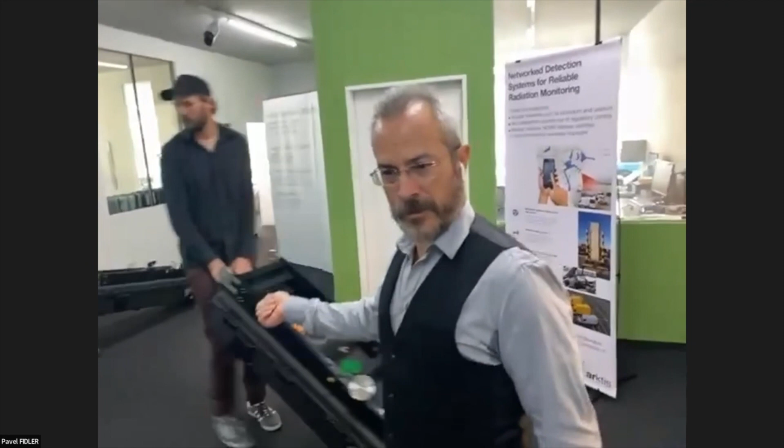It can scan for radiation while moving in a truck. You put it on the back of your car and use it, or it can be implemented as a portal. So the guys now are trying to mount it. It takes a few minutes. Essentially, the mounting process is made to be fast and stable.

The implementation of this can be done on uneven surfaces, and is thought to be deployed in situations like big events, even on grass or mud, or during radiation accidents, or any kind of application where you are mounting a checkpoint for a small amount of time, like a few days, and then you have to dismantle it.

We have two systems here in Switzerland, bought by civil protection, and they use it for doing checkpoints at airports, for instance, or at borders sometimes. We had a trial with customs a few years ago, on a system mounted into a van that is very similar to this. Actually, we use the same technology.

You can imagine Arktis technology as a building block. Our building blocks can be assembled together in order to generate a system that is fit for any scope you're interested in, especially in homeland security. So the technology you have inside, the user interface, and the way to use it is the same, essentially, from system to system, which is essential because every time you move from one system to another, you don't need extra training. You just work on the same user interface, applicable to another operation.

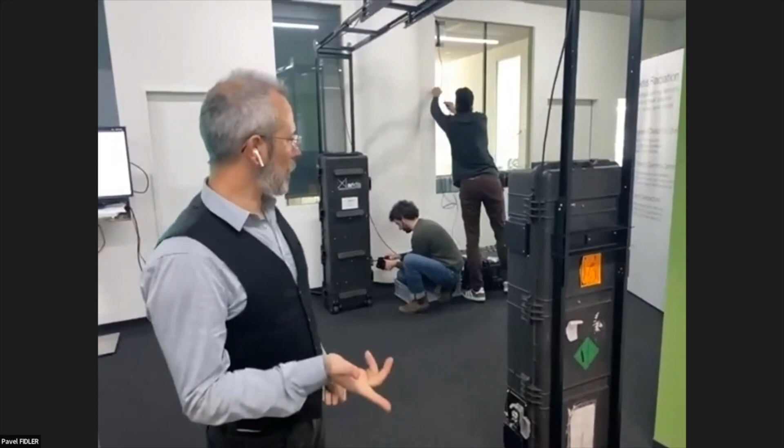This is one of the reasons why you can use it on the way to the place where you're doing the checkpoint, at the checkpoint, and the way back on the same day without needing to plug it in anywhere. Which is critical, especially in cases where you are deploying the system after an earthquake, for instance, where the infrastructure is not guaranteed.

It's connected via Wi-Fi, so you can see the user interface without physically connecting to the system, staying at a reasonable distance, even 10 meters, without being forced to stay close to the detector. Same goes when you're using a car - you put it in the trunk and you can see from the front seats the readings and the alarms and everything.

So the system is in practice mounted already, ready, as you can see. It's deployable by 2 people in a few minutes. In the meantime, while they finish this, I will show you the other device we want to show, which is characterized by the same type of features, like very fast deployment and very easy to manage.

We are talking about the drone module that Pirmin is bringing here. Also, this one comes in a very robust box, so completely free from bumps and scratches and vibration. The device is commercially available, everything, starting from the drone to our detector. Can we zoom in?

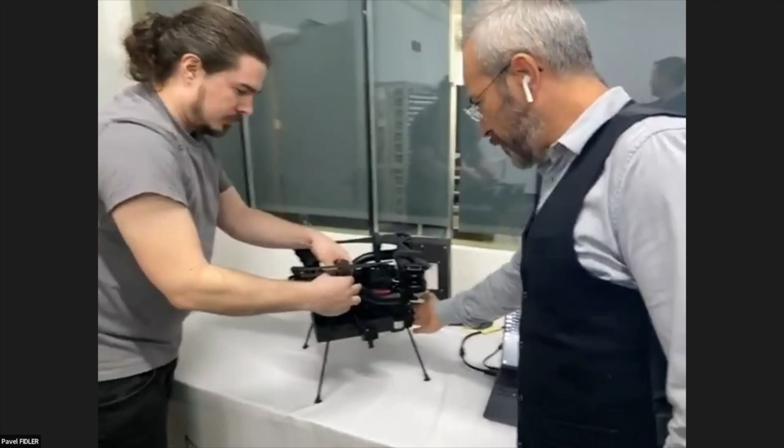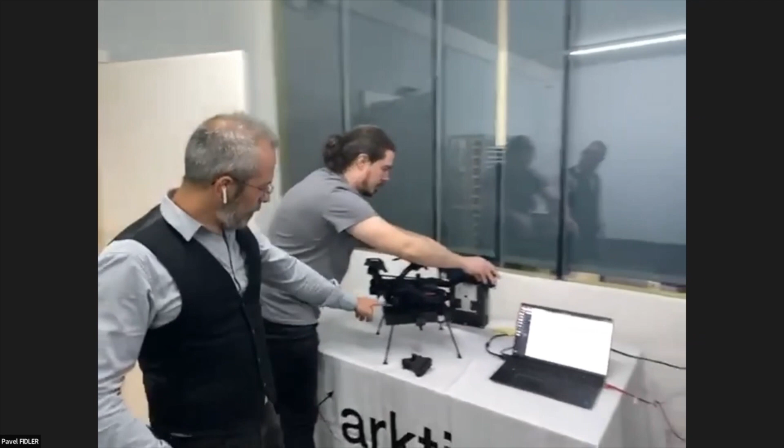And it's meant to answer all the typical questions that first responders involved in radiation monitoring are asking for. It comes with a LiDAR down here to measure the distance in real time from the drone to the ground, and with a camera for having visual evidence of the findings. The detector here, as you see, is way smaller than the other, because one is made for ground operations and this one is made for airborne operations.

And this drone, as I said, is commercially available. So it is not a prototype, that's a product. The drone itself comes with a set of batteries. Those batteries are characterized as being hot swappable. So in principle, if you have enough batteries, you can run a mission that can last for hours. Even though normally a drone can fly for 15, 20 minutes, the mission itself can run for hours thanks to these hot swappable batteries. Essentially, hot swappable means that you can replace the batteries without losing the power supply.

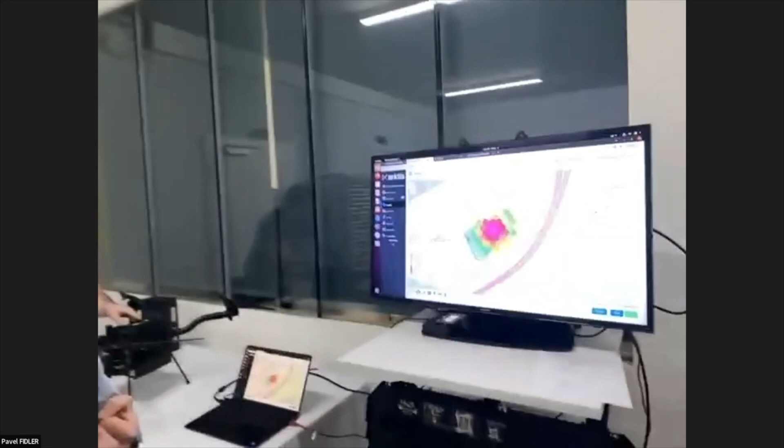The drone itself comes with a navigation software that allows you to generate a map. As you can see, running a small demo here, you can see a map. You can navigate the system using GPS location.

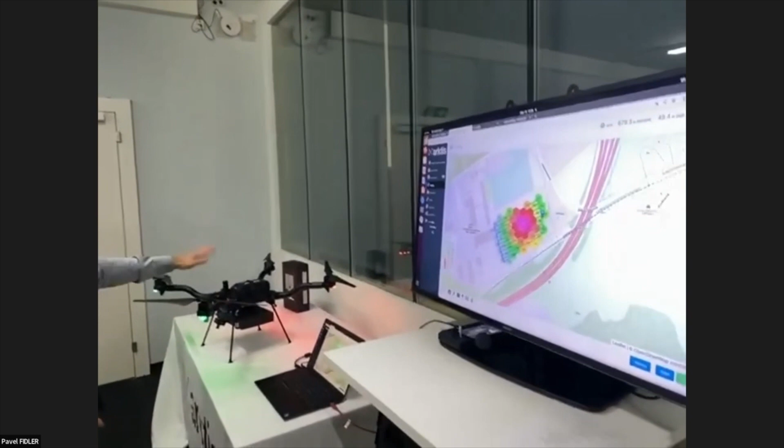So essentially, you can plan your map and your mission beforehand. So when you go to the place of the mission, you can already be ready. When the drone is at this level, so 2-3 minutes, you already have everything that you need for launching your mission. So time is essential, and this is what we try to do.

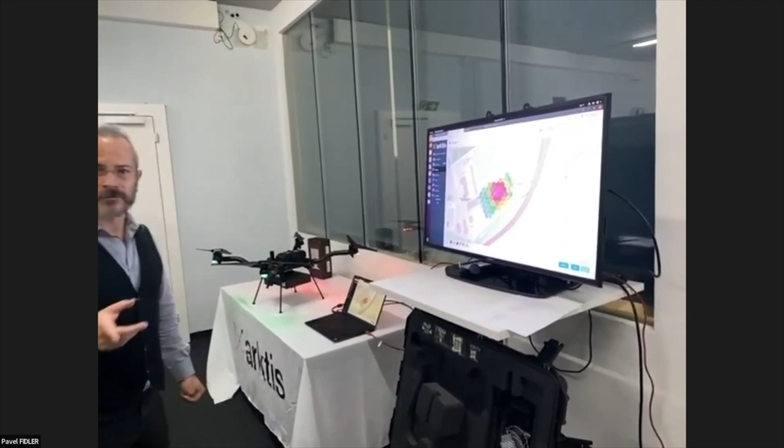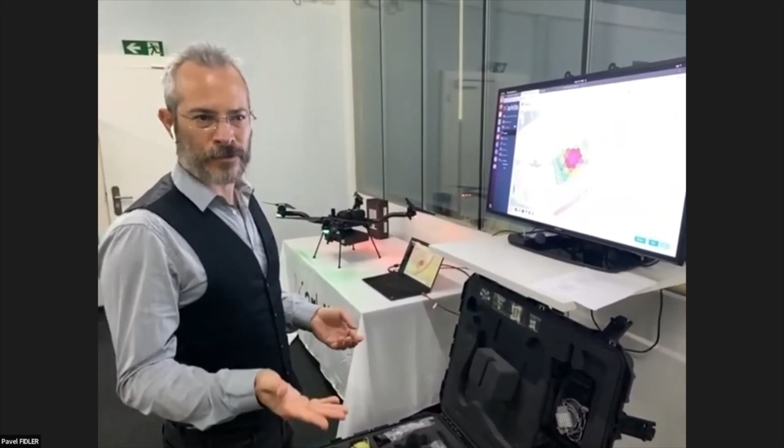The drone itself is connected to the ground station via Wi-Fi connectivity, and we can also provide an extra tablet, so that each user, even if not flying the drone or on site, even remotely, for instance from the headquarters, can see exactly the same thing you see on site, in real time. This is also critical because when the mapping is done, if there are no experts present on site due to risks or time implications, they can stay at headquarters and support the local team in real time. So the system is, I think, both ready.

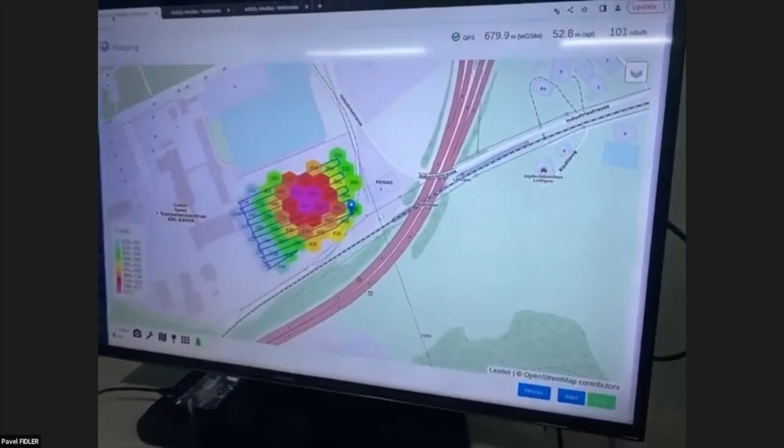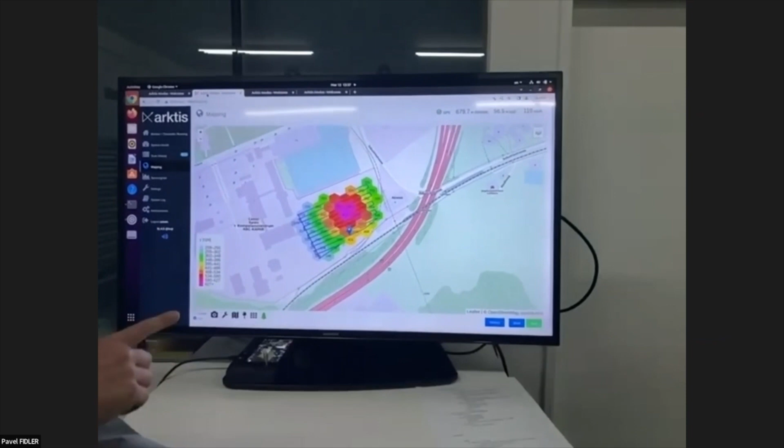We can show you right now a pre-recorded mission that we did at Labor Spiez some time ago. The mapping system here can record everything happening in real time, and then you can replay it after you download the data and information.

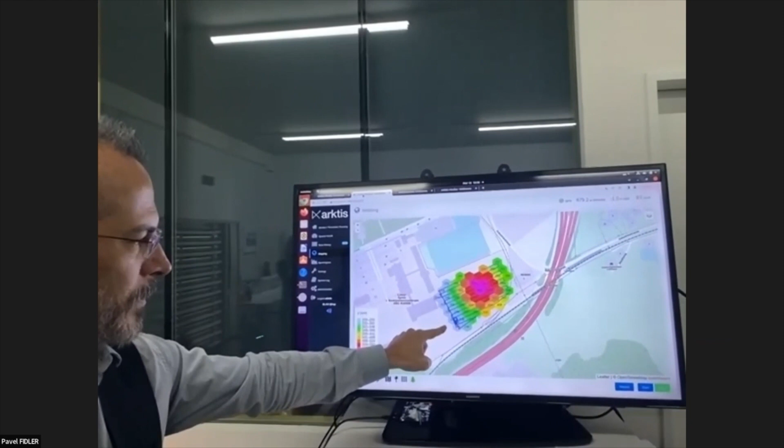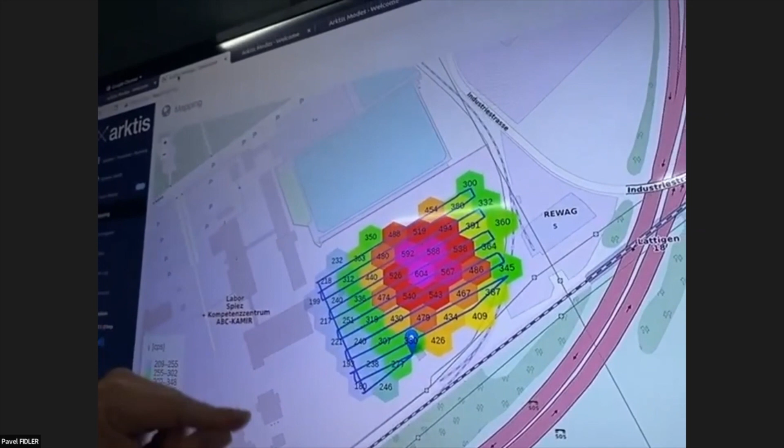Here you can see the virtual drone repeating the real drone mission, populating the map with the count rates coming from the detector, and based on that generating a heat map that tells you where the radioactivity hotspot is present.

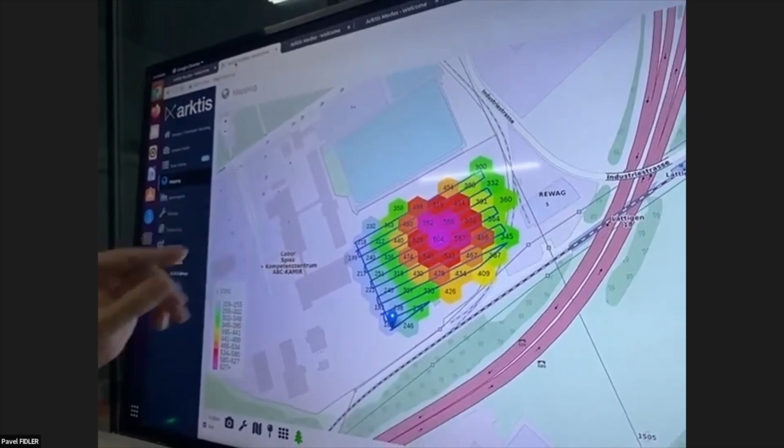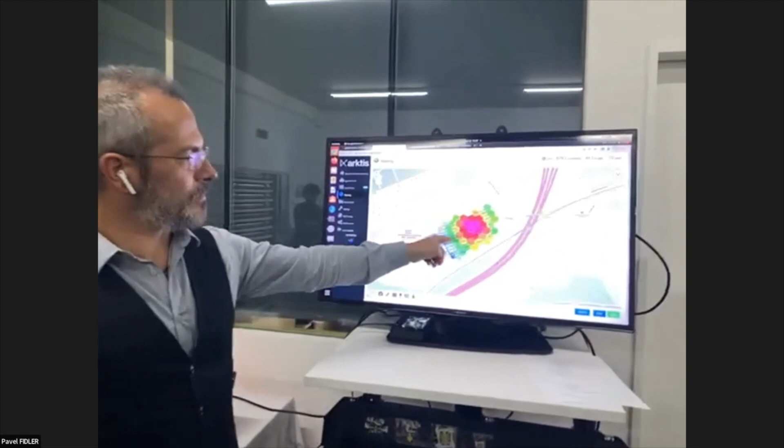The typical missions for this system are either mapping a wide area which is radioactive for whatever reason, like the explosion of a dirty bomb, or finding and identifying lost sources. That's a case where the radioactivity is diffused, but when we go for hotspots or single sources, you can easily identify down to the meter where the source is.

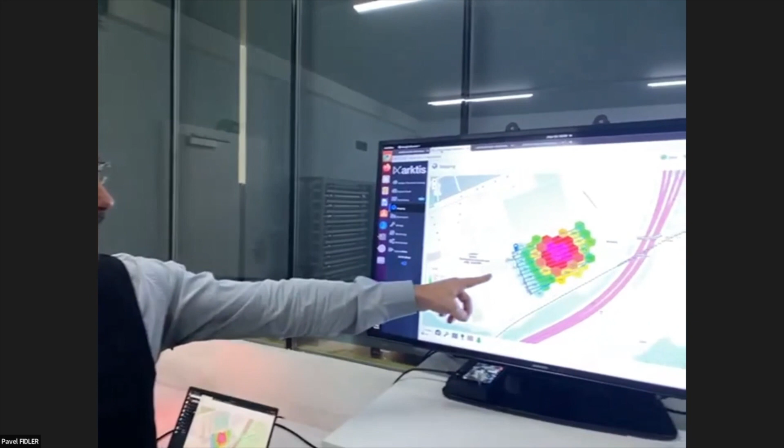And this, with a single passage, the drone can do. In a specific case, we were looking at a 3.5 gigabecquerel cesium-137 source, and the drone was flying at 50 meters altitude and 10 meters per second. So a quite fast run, and essentially in real time, what you see here is the actual speed of the drone when it was flying.

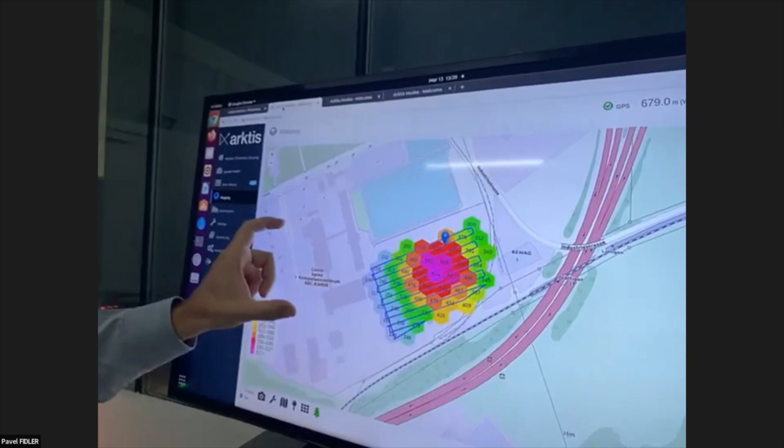So it can be done systematically like this, or it can be used to look for the highest radioactivity to investigate a specific spot.

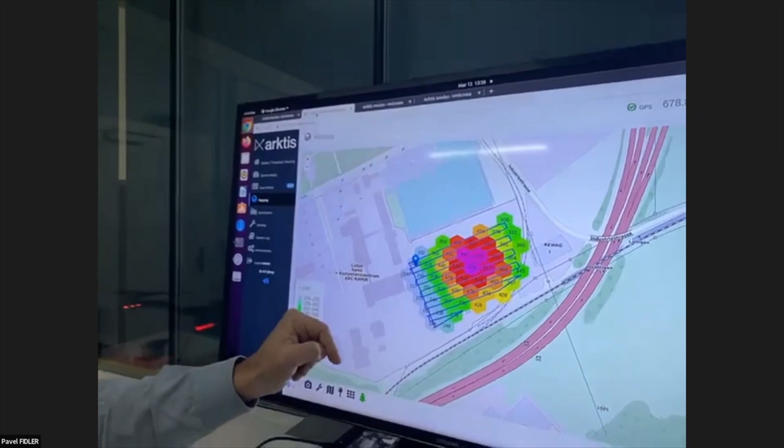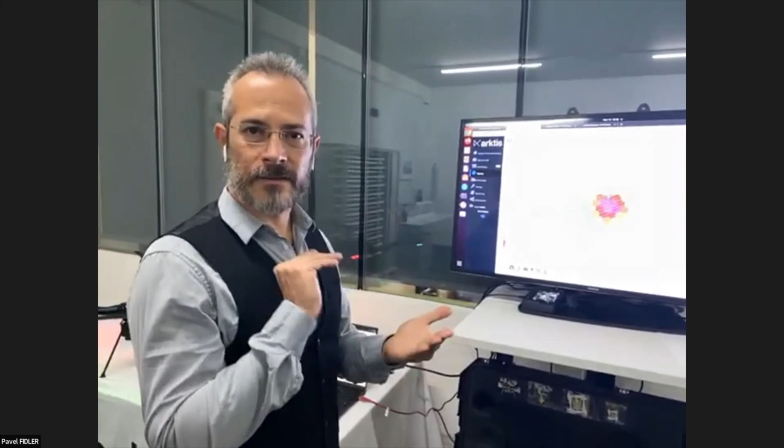Critical for the responders could be the dose at ground level, which is measured and calculated thanks to the LiDAR that constantly measures the altitude of the system, adapting the readings to the drone position and projecting them onto the ground. And the camera can snapshot the area you are investigating, to see if there's a visual presence of the source or anything radioactive.

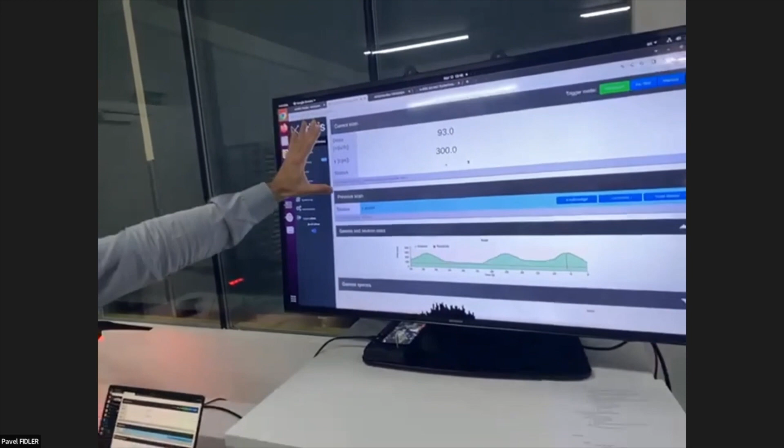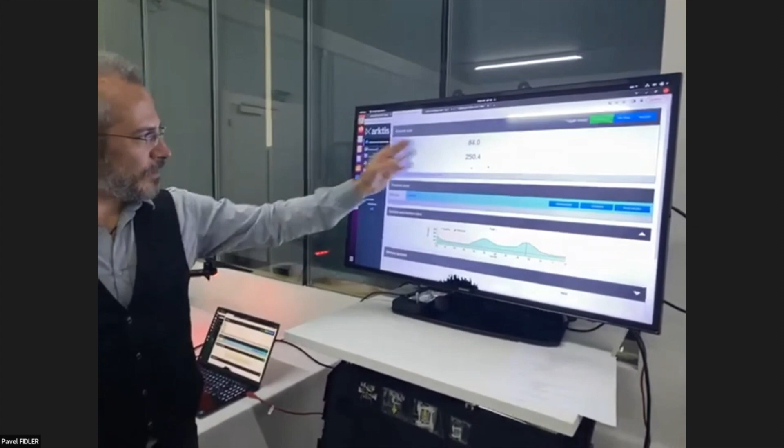The user interface, you can take a look. In general, the user interface has a first page where you have the basic readings. This is shown on a big screen for you, but you can also see it on your mobile phone. You have the readings, information about alarms, readings in real time, and the spectrum.

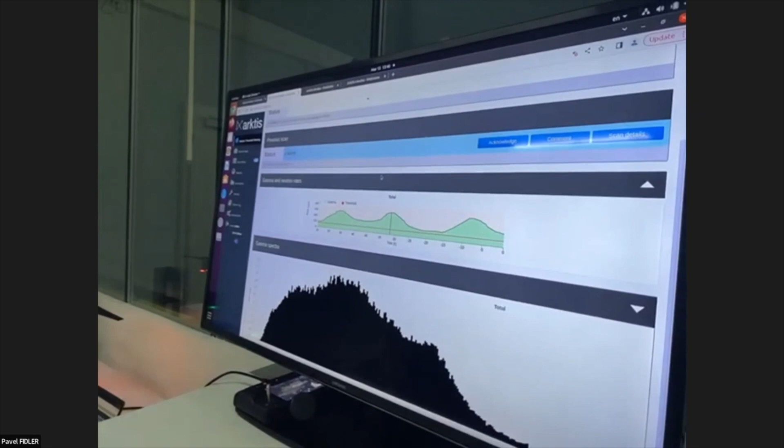The critical thing about this device is that it works exactly like the crystals, and it also comes with identification features for a range of isotopes, selected together with the end user to be the most common ones. So instead of having 100-150 different radioactive materials in a library for a crystal, which is far more expensive than a plastic scintillator, we selected only a few that cover essentially 95% of findings based on experience. Based on that, we can provide specific identification.

So you have information about radiation levels, the visual position, the map, and also the radioactive material identified, which is essentially critical. Now, if there are no questions, an interesting application for customs—

If you consider at the borders, there are always long queues of trucks waiting to be allowed into the country.

If you use one of those drones to do a preliminary check for radiation, you can fly high over the long queue of trucks, and based on the readings, you can pre-select trucks for a secondary inspection without slowing down your processes or deviating from the lane. Before a truck even gets to your kiosk, you can already say this needs to be more investigated or not. One of those missions will probably last 10 minutes or so. This will strongly help customs in their operation, adding radiation monitoring that is not very common in Switzerland at the moment.

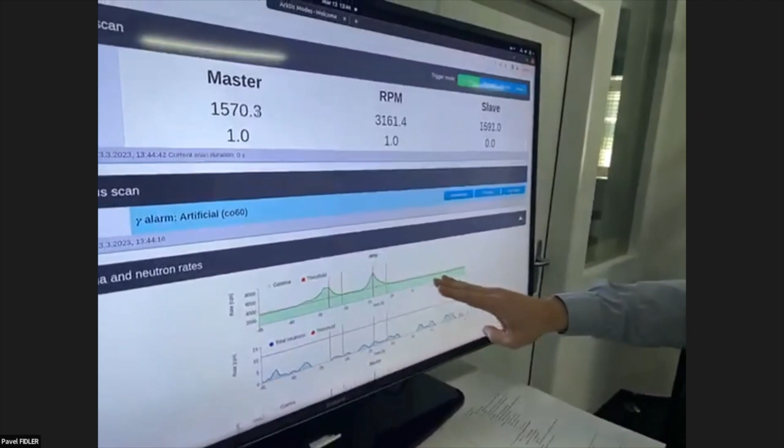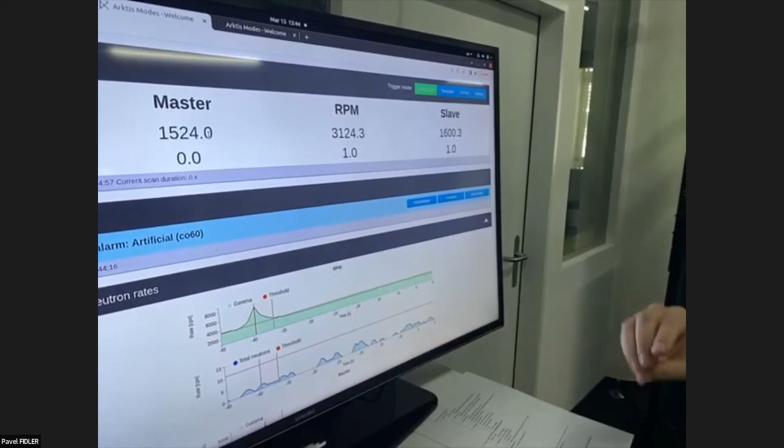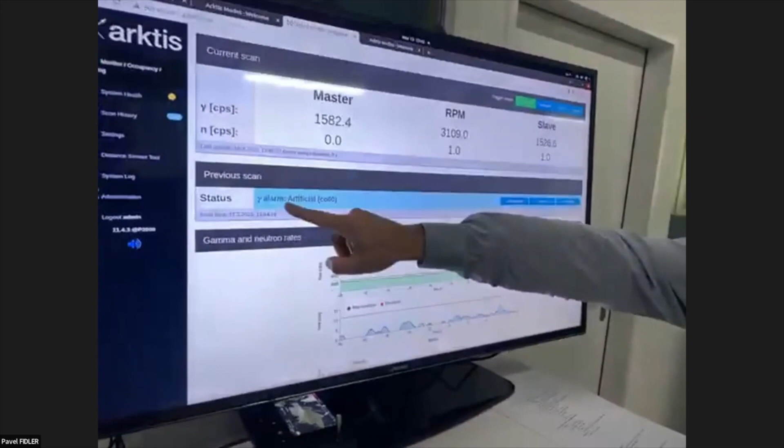So essentially, what happened? He was passing through the portal set for cars - it's very wide at the moment - with a very small testing source, and the system was showing this much count rate over the natural background. The system recognizes the presence of a person passing through thanks to the occupancy sensors, and the readings are anomalous over the threshold and over the background. This generates an alarm that is saved into the system and can be exported in real time everywhere you want. It also gives you information about what has been found. In this specific case, it was an artificial source, cobalt-60, which is a common industrial source.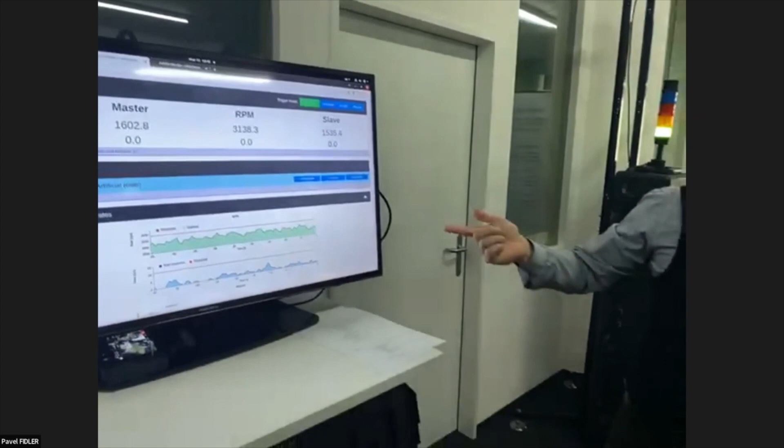We are not using any crystals, only plastic - this is one of the unique selling points of our system. As I said, we can do exactly the same thing with the drone, and they work in exactly the same way. So you can also show how the drone works with that.

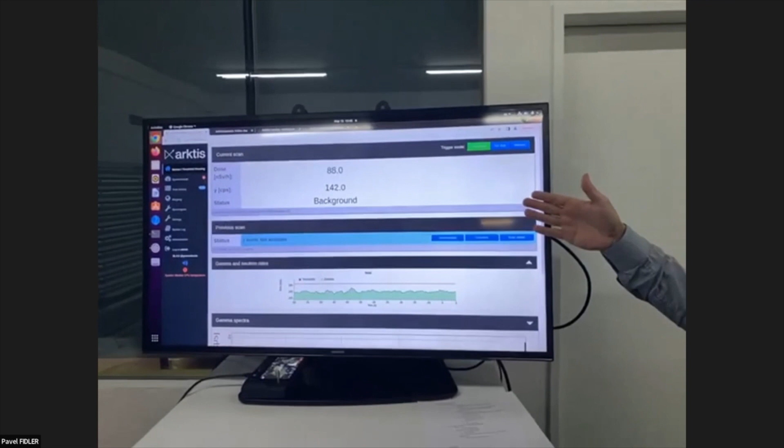We will swap the screen to the drone. So you see, essentially, when you look at the screen like now, you don't see much difference to what it was before, because the concept is to have the same user interface regardless of the system.

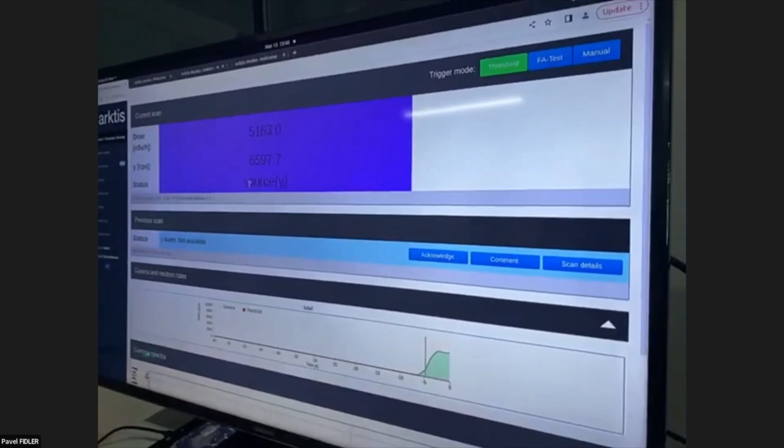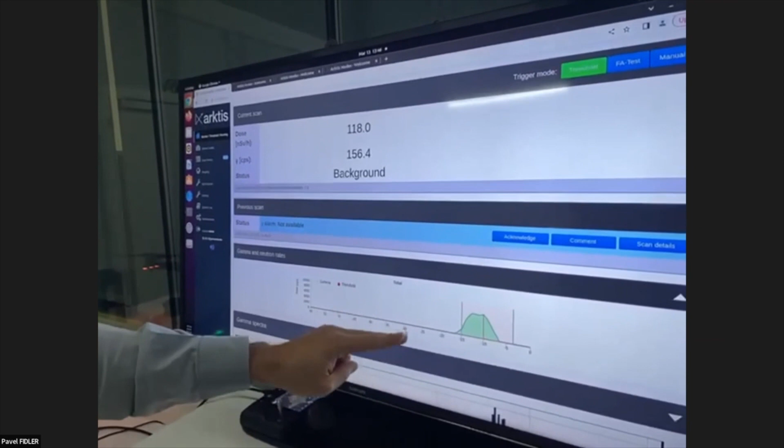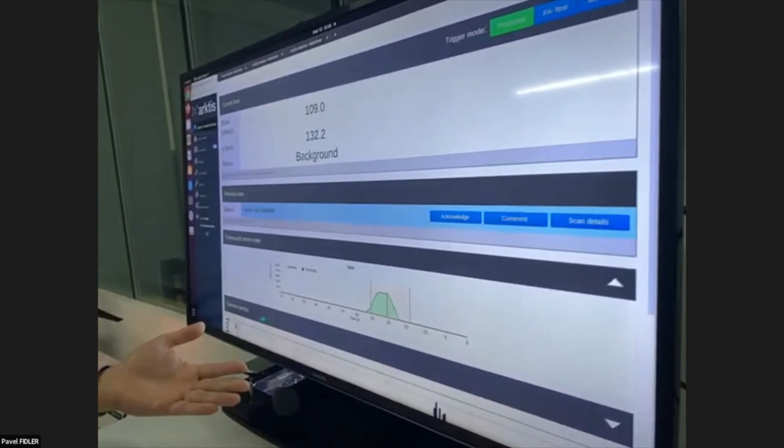Can we try it? Okay, please go on the screen. There we go. So as you see here, the detector reacted pretty strongly, to the point that you don't see the background anymore, because this system is supposed to be extremely sensitive, since they fly at high speed and high altitude. So to have a source so close is unnatural. But as you can see here, it's easy to verify the presence of a source and when it happened. This moving plot is in real time, as I said.

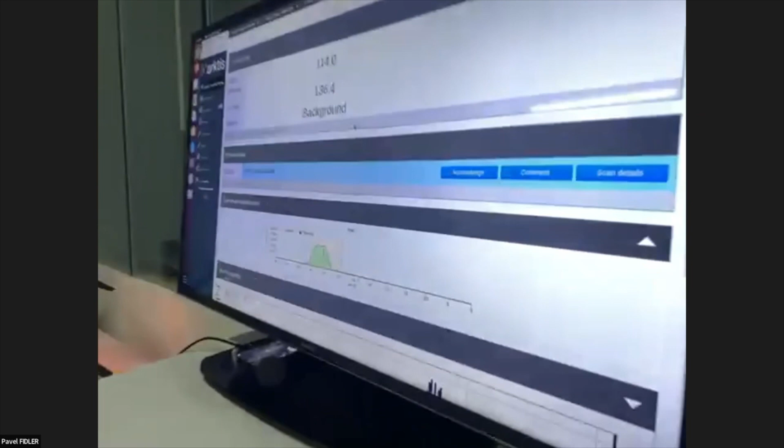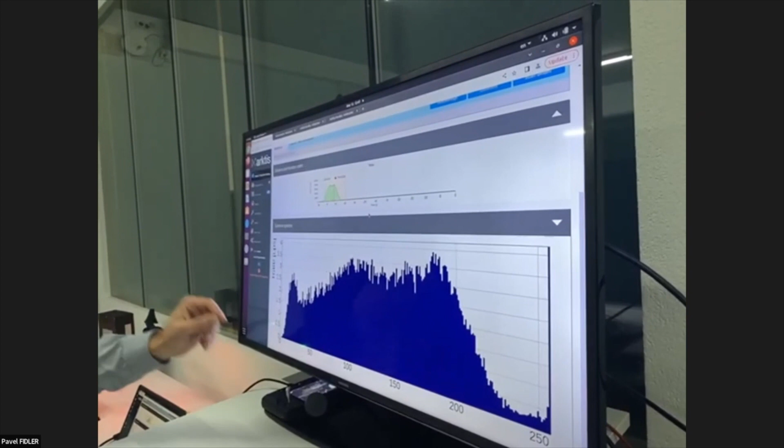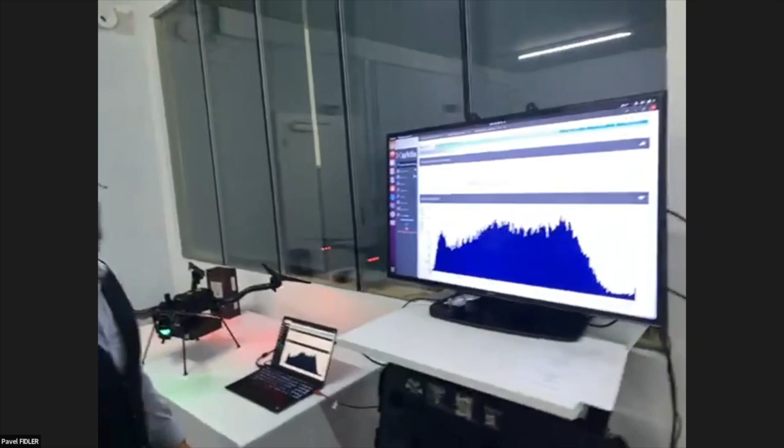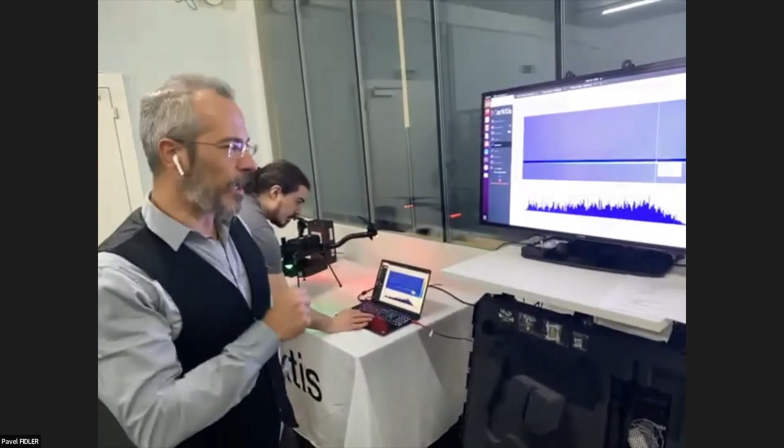If we scroll down with the user interface, we can also show how it looks when it's detected by the system. Now it's a sort of spectrum where the information about the source is analyzed and the source is identified. Everything gets saved into the system, on the ground and at any remote system that you would like to have. So essentially, if you have a remote station where a pool of experts are sitting there waiting for alarms and to assess the severity of the alarm, all that information can be sent in real time. Time is of the essence, as I said - that will be the fastest possible approach.

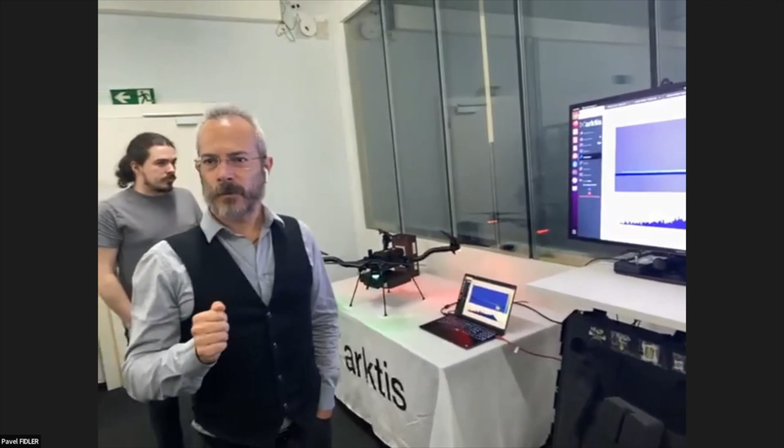Now we have still a bit of time, so what about questions?

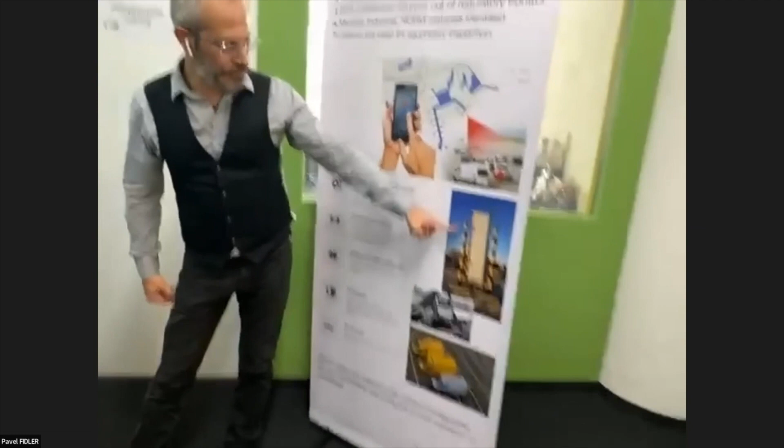This, for instance, is one pillar of our systems currently working in Antwerp, Belgium. A typical portal is made of two of these pillars covering a single lane. Very importantly, they are compliant with specific standards recognized worldwide, for instance IAEA standards for radiation portal monitors, or ANSI standards, American standards for radiation portal monitors. This is very well regulated, and being compliant with these standards means we are sensitive enough to cover all expected situations for scanning cargo and vehicles.

Thank you for your answer. One more question concerning false alarms - as the drone flies at quite a high altitude, there will probably be a lot of false alarms. The question is about focusing on the object. Does your drone have special software that makes it possible to focus on specific objects, or does it cover the whole area, including surroundings, woods, and so on?

Well, for navigation, the drone in this version doesn't have obstacle recognition, so it has to fly at an altitude where there are no hindrances, like trees or buildings. This is up to the pilot, let's say.